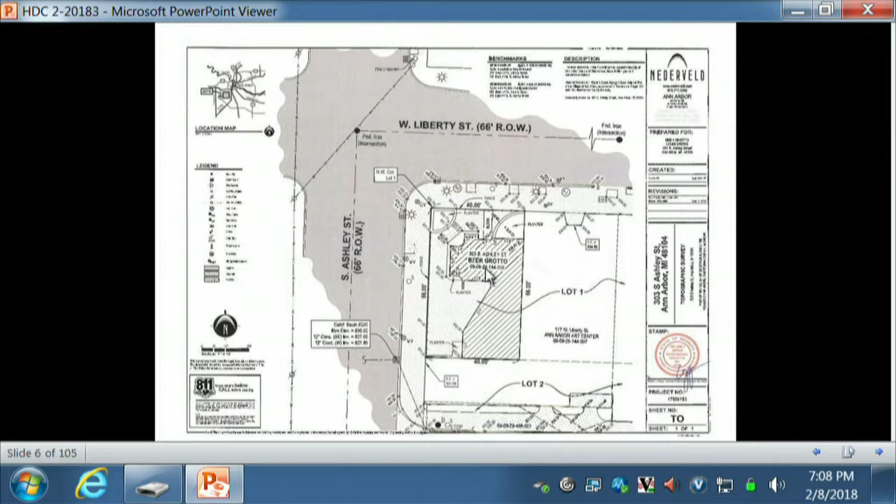They're proposing to put a canopy here. The filling station is angled here, and this is that new brick part that you see on the front. The canopy is proposed to go here.

It's pretty much where that tent is right now, so that gives you a pretty good idea of its size. The treatment of the ground, with some brick pavers and some concrete, is not proposed to change.

And this area just south of the canopy would remain open. It's got a couple planters and a tree back there. It would end basically at the south wall of this addition up here.

The canopy's supporting posts are inset - it's on the plans, we'll get to it - a foot or two, to accommodate the eave overhang so that it doesn't encroach into the right-of-way, which is on the other side of the fence.

Here's a little bit better photo from sunnier days, with the tent with the walls taken off. Lots of outdoor patio seating there. Old filling station in the back.

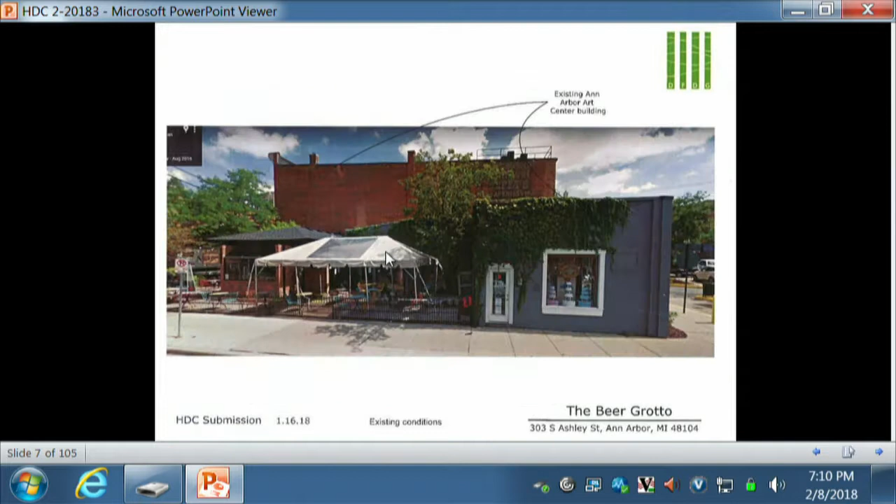One interesting thing is that the front wall of the building has this blue stuccoed wall that's very similar, with an old window in it, to the filling station part in the back. So I've always wondered if the older part of the building just wrapped around up here, and maybe that was the office or something, but I don't know. We've never figured that out because, again, we've never found photographs.

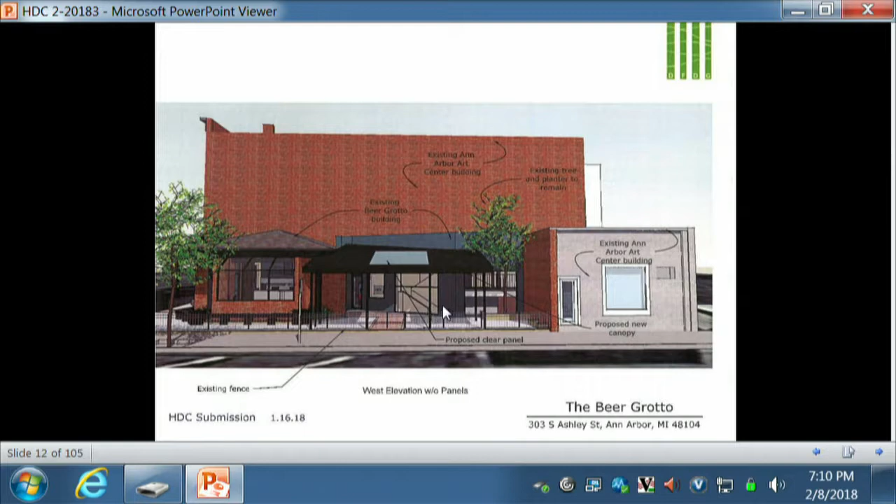So here's a drawing showing the fixed canopy - black, it's a vinyl or canvasy material. It's got a large clear plastic panel on the top to let light into it, and then panels can be added to make it more of a three-season type treatment.

There's the existing fence - you can see how those posts are set in a little bit to line the eave up with the fence. It tucks in nicely under the existing eave of the roof on the front addition, and it's got enough slope on it, hopefully, to get water and snow off of the top. There's another look at it.

So this building is tough because it's a contributing structure. You can pick out the gas station if you're looking for one, and the bays where the vehicles used to pull in, but it doesn't have a lot of character-defining features yet.

Fortunately, what they're proposing to do here is not permanent in nature and is pretty easily reversible. There's a system of attaching - I can't remember the strip - that the whole thing hangs off of onto the wall, which will be minimally invasive to the concrete block of the blue filling station part of the building, and again, very reversible.

And pretty transparent - you'll still be able to see through it. Another nice thing about it is this will not be conditioned space, so we don't count it as interior space, meaning it's not like an addition where they could go in later and blow out that whole wall of the filling station and just make it one big giant room.

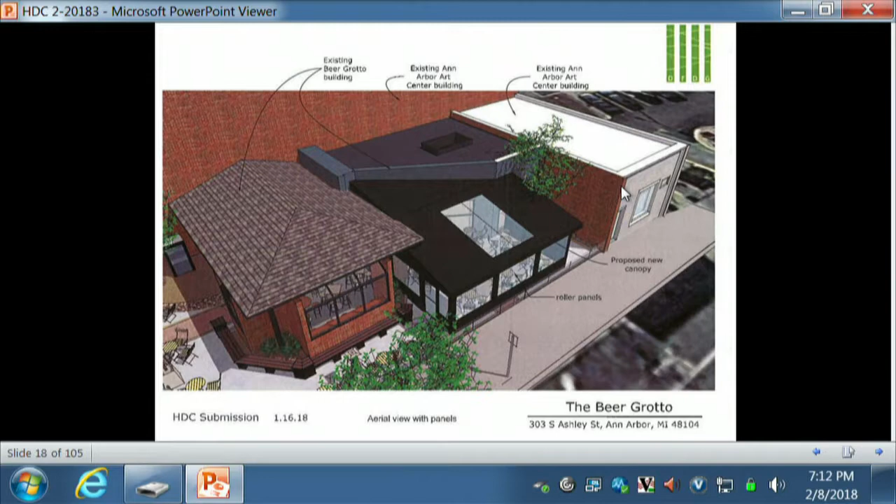Again, it tucks very nicely underneath the eave of the addition here, and hangs off the building in the back. That's a good shot. There are more drawings in the packet than we're showing here, but that shows you some of the roof structure.

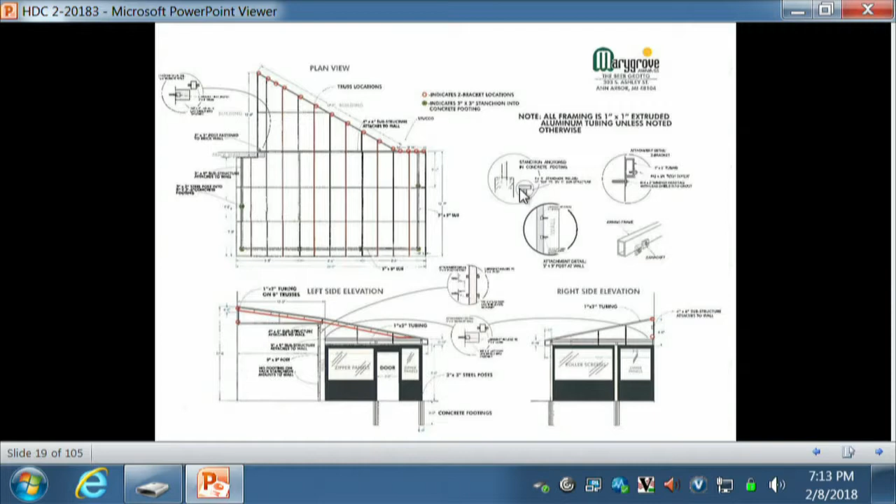The canopy is 26 feet wide and between 15 and 28 feet deep, depending on where you measure it. Just to be clear, it is intended to stay there year-round, and it will need to be site planned because it is additional year-round seating for the restaurant, for the beer grotto.

From the Secretary of Interior standards, number 1 says that a property will be used as it was historically, or be given a new use that requires minimal change to its distinctive materials, features, spaces, and spatial relationships. Number 2 says that the historic character of a property will be retained and preserved - the removal of distinctive materials or alteration of features, spaces, and spatial relationships that characterize a property will be avoided.

Number 9 says that new additions, exterior alterations, or related new construction shall not destroy historic materials that characterize the property. The new work shall be differentiated from the old and shall be compatible with the massing, size, scale, and architectural features to protect the historic integrity of the property and its environment.

Number 10 says new additions and adjacent or related new construction will be undertaken in such a manner that if removed in the future, the essential form and integrity of the historic property will be unimpaired.

From the Secretary of the Interior's Guidelines for Building Site, recommended is designing an exterior addition which is compatible with the historic character of the site and which preserves the historic relationship between the building or buildings, landscape features, and open space. I think that this accomplishes that by still retaining the feel of an open patio, but allowing it to be used in cooler weather as well.

Removing non-significant buildings, additions, or site features which detract from the historic character of the site. From the guidelines for the district or neighborhood, not recommended is introducing new construction that's visually incompatible or that destroys historic relationships.

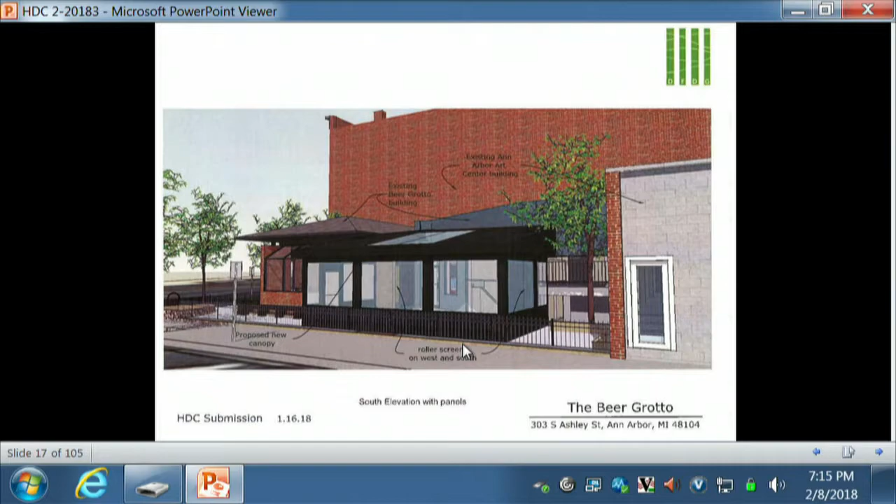You want to start this one? Sure, I'll give the report. It was such a nice day on Monday when we were out there. I generally agree with staff on this one. I think it's a very good solution, and it does meet our guidelines.

I think it does push the boundaries a little bit as far as space and sizing goes, but being that it was totally open 8 or 9 months out of the year, I think we're going to get a better look at the building with this structure than what they've been doing. It is removable — even though it's going to be there permanently, it seems pretty easily taken apart and down.

The one thing that came up at the site visit was anchoring into the stucco on the original filling station. Us not knowing really what's behind the stucco, and if we are actually destroying really nice bricks back there — maybe piloting and finding out first what's back there before blasting holes into the wall.

And I think another thing that came up on the site was about the fence. You'll see in the application there is an image that shows a new fence. That issue also popped up, needing a little bit of clarification from the applicant.

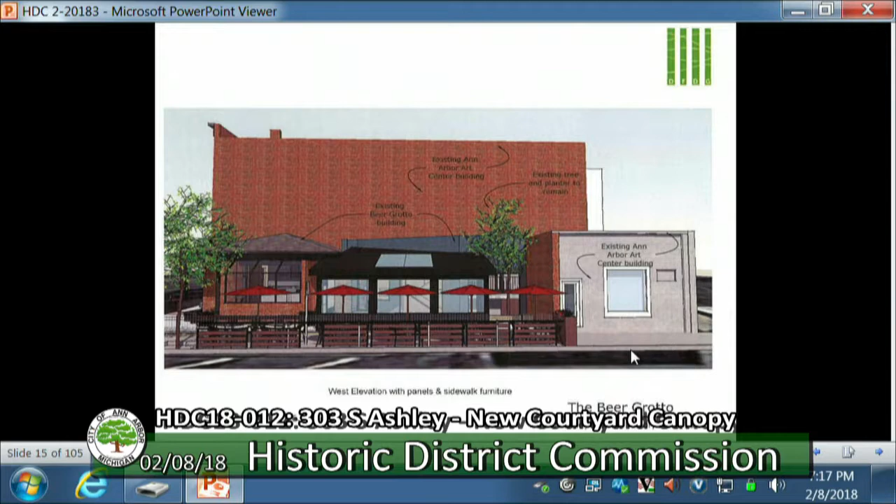Which image? The one with the red umbrellas in the front. There you go. Oh, that's the sidewalk, not the site — you can see the site is east of the fence, and these are on the sidewalk. Oh, that's seating, between the seating and the existing fence. Is that added in front? Yeah, it's the same as — that fence is out here, it's just a barrier for the sidewalk. Okay, we just didn't see that on site, so we looked at this and went, oh, is there a new fence or something? Yeah, that's with the sidewalk furniture, that's when they get their sidewalk permit, put that shown up temporarily for contrast.

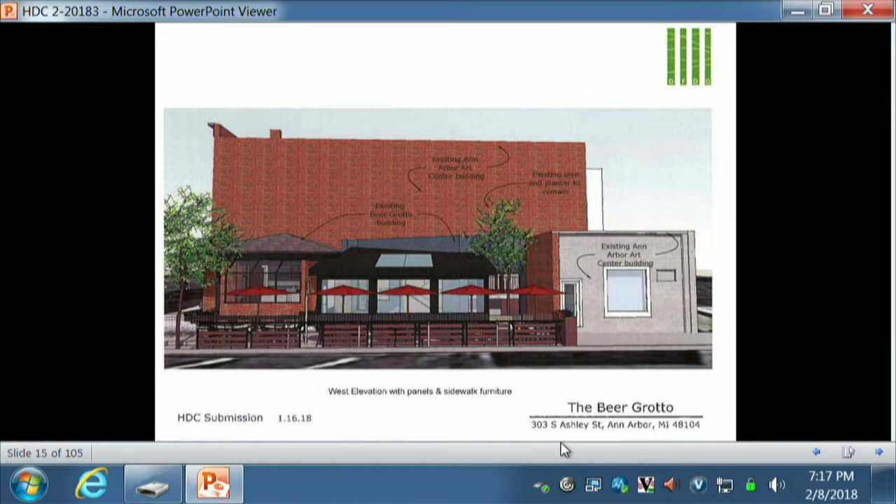So the wrought iron fence stays, things out there are temporary. And then we'll have to ask the applicant, or maybe Ms. Thacher knows about the material of the existing building, and if it's CMU or brick. I believe it's CMU, but we can confirm that.

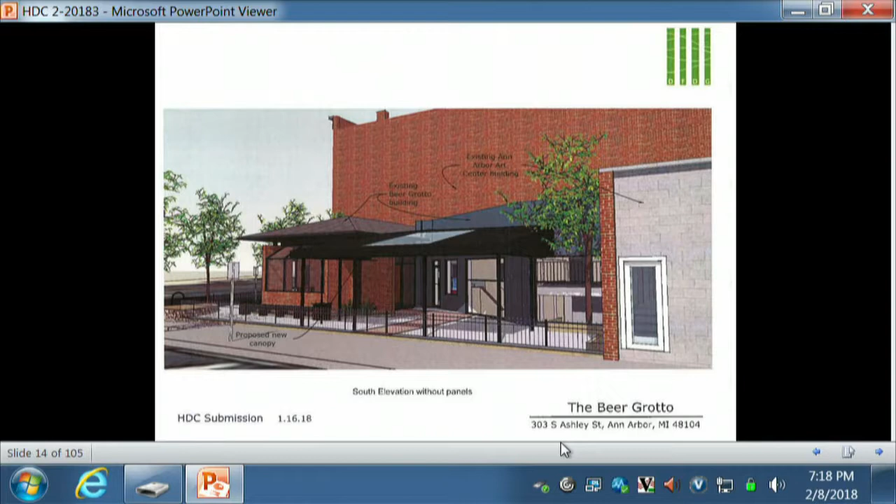Yes, my bad with the graphics there. That was just intended to show when the sidewalk seating gets introduced, that we have to do some sort of barrier there, and that'll be part of that application.

As far as the building is concrete block, I have some pictures we could pass around of the interior. You can very clearly see the coursing of the CMU on the inside. So we will trace through from that in order to put the anchors. If you look on the Marygrove drawings, the sealed engineering drawings on the front page in your package, this detail in the top right-hand corner specifies that we have to go into the grout in order to meet the structural binding, because of the lack of tie-in through the wall of a concrete block.

So we really have to accomplish that. I have with me one of the brackets and the screw that will go into the grout - there are 15 of these. And this is a piece of the top rail. The canvas gets wrapped around this, goes into there, and that's fixed to the wall. So 15 of these little pieces, and that's the top rail. I also have a sample of the two actual materials that we'll be using.

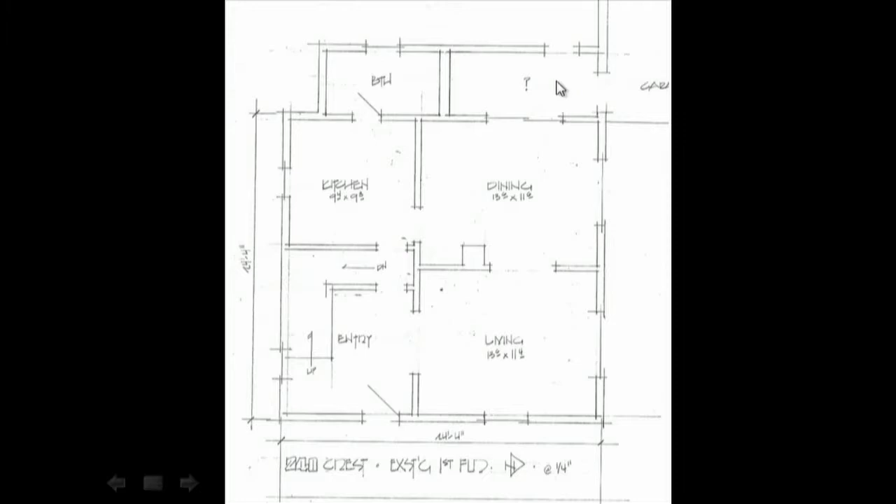Existing floor plan, pretty basic on the first floor: entry, living, dining, kitchen. That's a bath back there, and then this is just another space. This is the existing second floor above it.

All of the hashed area is existing, and this is the proposed footprint of the addition on the back. It fills in the corner nicely between the house and the garage. The deck wraps around to give access to the backyard, and there's a door wall or slider into a new family room on the ground floor.

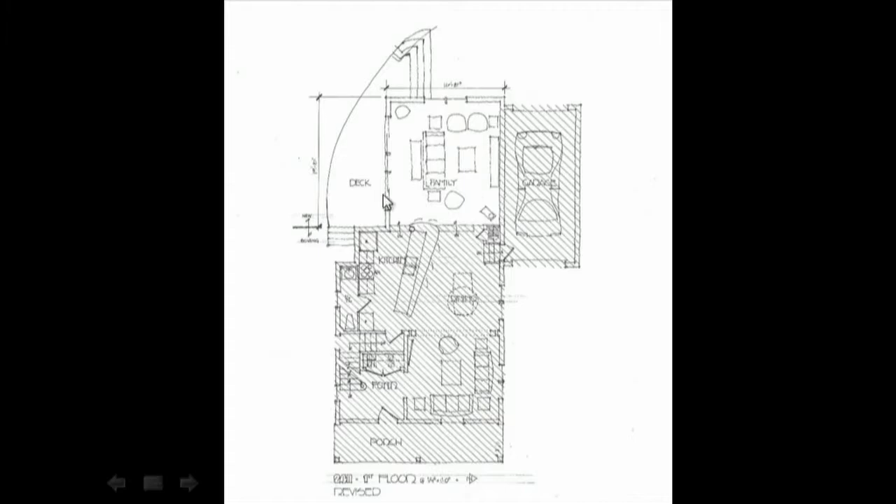On the second floor, there's a master bedroom, reconfiguring the existing floor plan upstairs.

From the front, things that will look different are a little saddle proposed between the addition and the ridge of the garage. The infill double doors would be replaced with a garage door again. On the back, you see the addition here. The ridge height is the same as the ridge of the house.

Looks really tall and narrow here. Bear in mind this is contorted on this screen, so it looks taller than it needs to. But this is that little bump out that I was mentioning before.

A portion of the rear shed dormer is preserved back there. There's a new garage door proposed on the back so that you could essentially walk all the way through the garage if you wanted to, or drive through. You could. And there, you can see the little saddle here.

Cladding on the addition is proposed to be a HardiePanel, so it will be smooth and will contrast with the shingles on the rest of the house.

Here is the garage side, the north side of the building. Existing garage here. You can see that the sidewall is flush with the sidewall of the house, though the roofs will intersect here, and you'll be able to see where the original sloped roof will still exist.

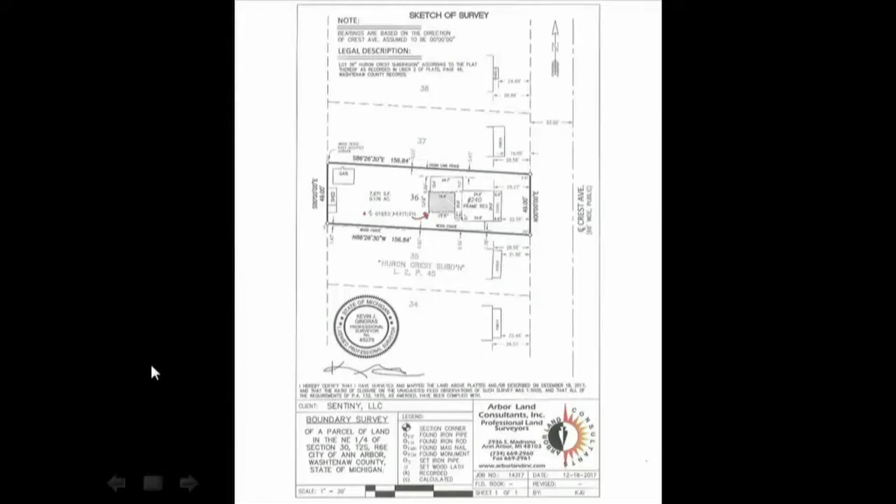So anyway, what I'm getting at is that I wouldn't lose any sleep over recladding that garage with new wood shingles to match and make it a little more weather tight.

There's no guardrail required or proposed on the deck. Deck materials are not specified, but I think it's okay to have it be a wood deck or an imitation wood deck. It's mostly out of sight and low to the ground.

There is a fence here, but we don't really count that. If the fence were down, it would still be pretty invisible from the street because of its low profile.

The list of work in the application includes finishing the existing outbuilding in the backyard, but no details are provided. So this statement is assumed to be just informational—maybe there's restoration work going on, maybe it's all interior—but no exterior changes are proposed in this application.

The Secretary of Interior standards that best apply - I read number 2, number 9, and number 10 to you. From the Secretary of Interior's guidelines, recommended is designing new exterior additions to historic buildings which are compatible with the historic character of the site and preserve the historic relationship between the building and the landscape.

Guidelines for all additions from the Ann Arbor Historic District Design Guidelines say it's appropriate to limit the size and scale of the addition in relationship to the historic building so it does not diminish or visually overpower the building. The addition's footprint should not exceed half of the building's footprint or half of the original building's total floor area.

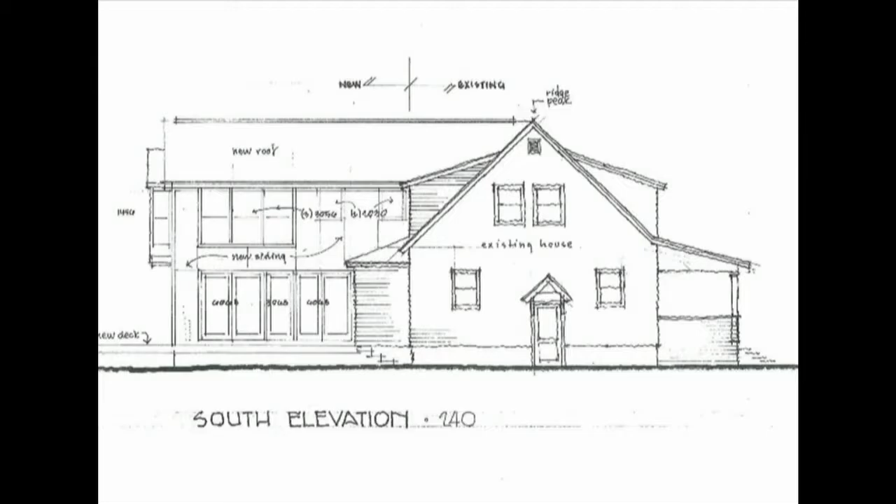Thank you. Myself and Commissioner Cope, we're on the review committee. Do you want to start the review again, or do you want me to? You can go ahead. Okay.

So where to start? It's definitely perceived as a very small house coming up to it from the street. The street front is fairly similar with all the rhythm of the houses in the adjacent neighborhood. What we can tell right off the bat going into the backyard is that all the houses around it are huge. They're big, they have big additions. This is the one on the block that hasn't been blown up in the back yet.

So in terms of the other quirkiness of the building, there was a discussion out on site with the builder we met with about the siding on the garage, I should say. So we'll have to get some clarification from the owners.

What else? Commissioner Cope, do you have anything else to add? Yeah, I guess I was a little concerned with the saddle as well. In the drawings, you see it there, but I understand its function of watershed between where the two roofs come together. But it just never, I don't think it's very clear in the drawings, what its specific use is or why it's there.

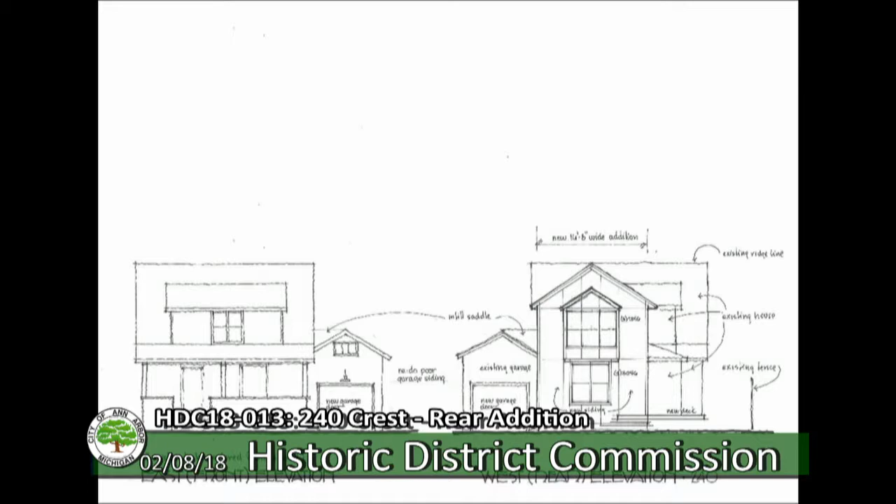I just didn't want to - getting the water off that intersecting corner there is problematic. So it would be much easier to get it to the back and get it off and deal with it there. Also, that's where we're going to have our stormwater detention feature, and we can move the water there. So it would be inappropriate to try and put something flat in there - it's just going to create problems for the homeowner in the future, plus snow collecting in there and whatnot. So the exact specific details of that saddle have not been worked out.

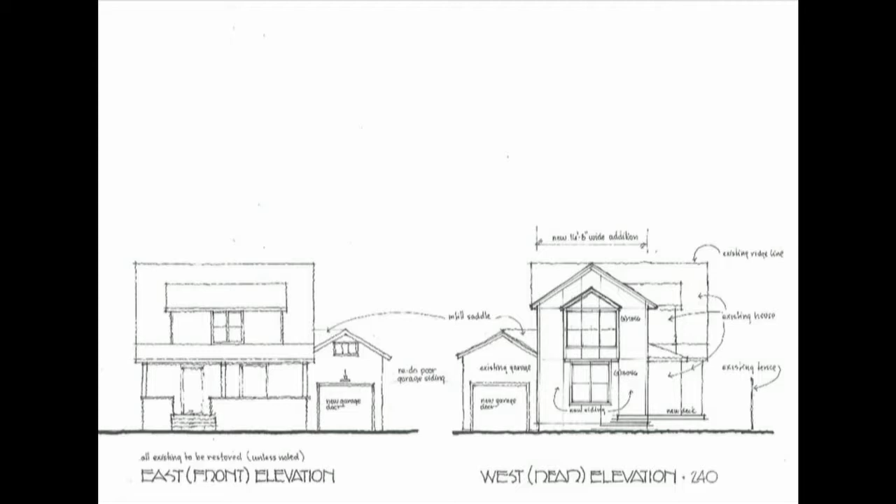But are you proposing a wall that would be in the same plane? No, it's just a roof plane. So the roof plane slopes to the back? Yes. At the front of the garage there'll be, above the plane roof, a wall that's flush with the front of the garage that goes up to the top of the saddle, and then it slopes back. A single slope? No, I want to angle it so it looks like a roof feature and not a flat wall - so it looks like a steep roof at the front part of the garage.

And then maybe that's 5% of the whole length, and the other 95% is all going to the back, or something like that. Do you see this elevation that's on the screen now? It sounds like a reasonable - well, that's shown as a vertical wall for the full length, but that's not my intention. So you're trying to move it back and have a slope? Yeah, so at the front it looks like a roof plane, not a wall plane.

We don't know if the existing garage is contributing, do we? Or do we think it was? The attached garage is contributing, it was built before 1925, or it shows up in the 1925 Sanborn. The building in the backyard doesn't show up on any Sanborns until the 70s or so. I've always speculated it may have been moved from another neighbor's property across the backyard and stuck there, because it doesn't look like a new structure, but it doesn't show up on the Sanborns, unless they just didn't peek around into the backyard.

Carl, did you say the two garage doors are for construction vehicles? Right, and to get back there, the backyard is a mess, and there's considerable landscaping that's going to have to go back in, so we need to get back there, and there's just no way around that.

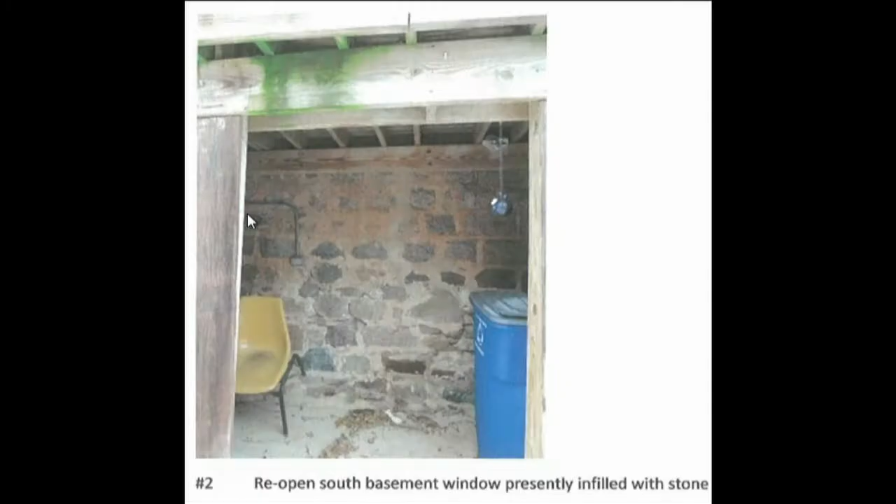There's an opening here on the wall that's infilled with stone that would be reopened. I'm sorry, it's an original opening that was refilled in stone. Here is the west basement window that would be reopened and reworked to make an egress window to an existing bedroom. This is the south basement window, yep, that's been infilled with stuff. You can tell where it doesn't match.

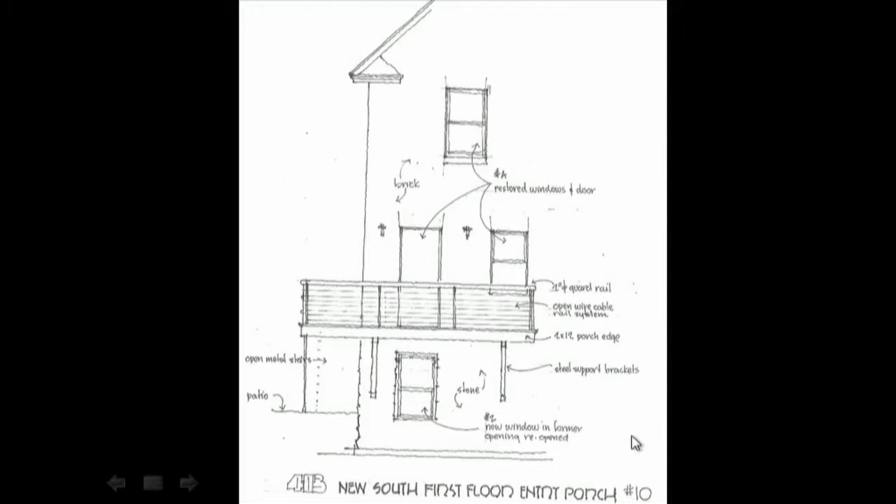Here's the new proposed back porch with metal stairs going down to the patio, with a very simple cable design for the guardrail. It should read as very inconspicuous and open up this whole area on the back so you'll actually be able to see that very cool stone wall on the back, the foundation.

Existing and reworked hump on the roof with glass panels, tempered skylights in the top.

Here's the carport. It is 3 bays. This building, if it's a duplex, will be required to have 3 parking spaces, and that would take care of that. You could potentially talk rental housing into counting that little garage as a parking space, but I doubt it's really big enough for most modern vehicles unless somebody's driving a Chevette or a Yugo.

The carport would have the effect of formalizing the parking area and keeping people from just parking all over the place. It is a structure and it is going to be pretty visible from West Liberty Street, so it has advantages and potentially some disadvantages.

It has vertical board screening on 3 sides, so it won't be entirely transparent. Standing seam metal roof. The whole structure is only about 14 feet tall, and if you consider there's a 4-foot retaining wall, you're only going to be looking at it from about here on up—actually, more like from here on up when you're looking from Liberty Street.

Example of a fence I'd like to use.

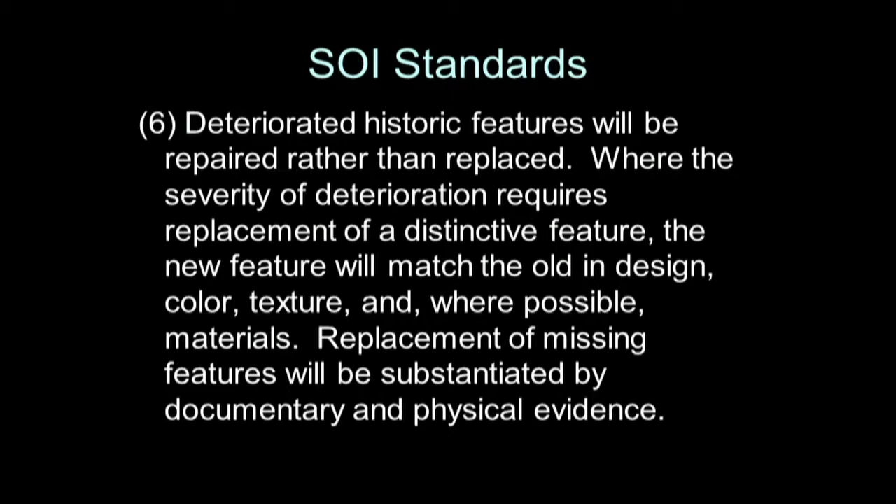I've read to you numbers 9 and 10, and this guideline for building site: it's recommended to retain the historic relationship between buildings, landscape features, and open space. Health and safety guidelines recommend complying with health and safety codes in such a manner that character-defining spaces, features, and finishes are preserved. For windows, it's not recommended to introduce a new design incompatible with the historic character of the building. That's as close as we get to talking about egress windows.

Just a couple more notes.

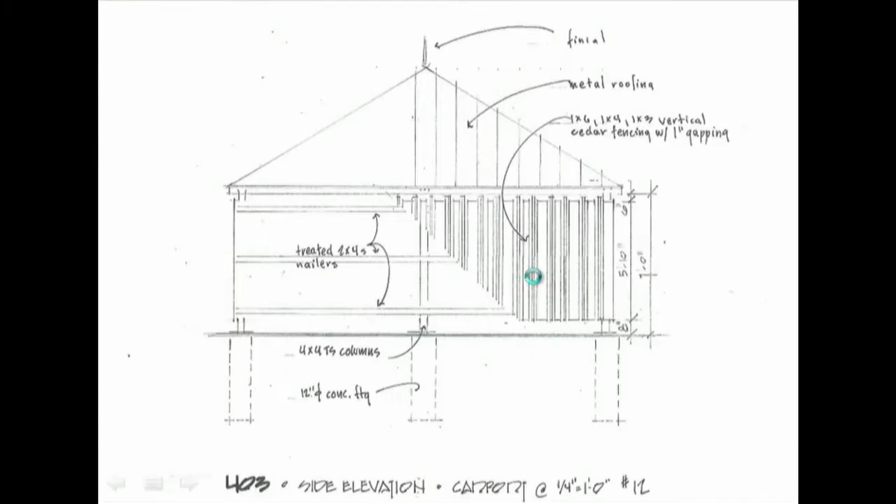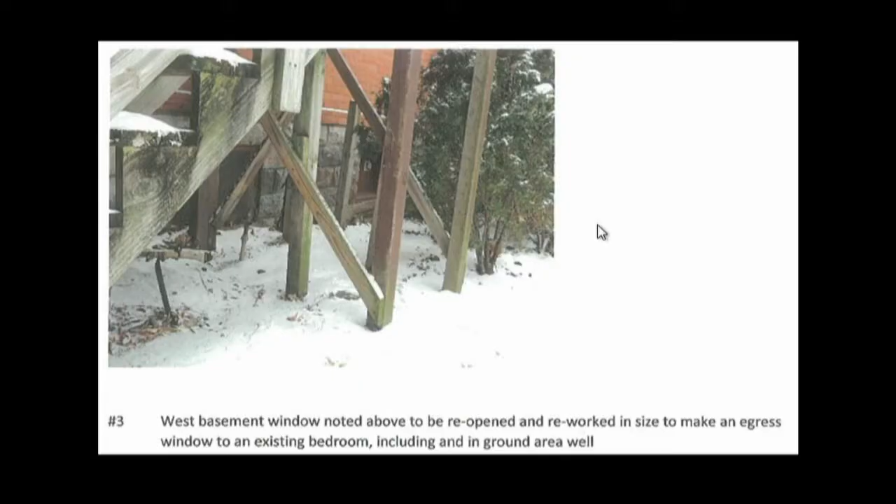The parking area in the back is proposed to be grass pavers—pavers with holes in them that vegetation can grow through—which I do think is appropriate. The patio is proposed to be a bluestone patio, which also will blend in quite nicely with the site.

I had a little email exchange with Carl Huter, the architect, about where the parking area would end in relation to the rest of the yard over here. It does seem appropriate to draw a line from the back of the garage or the back of the house to this area as the maximum size, so that from 2nd Street you still see sort of a gravel two-track going back here, which has been there for a long time.

Staff's opinion is that the work does not destroy historic materials, features, spaces, or spatial relationships that characterize the property, that the new carport is adequately differentiated and compatible in size, scale, and design, and that overall the proposed work enhances the character and historic integrity of the house.

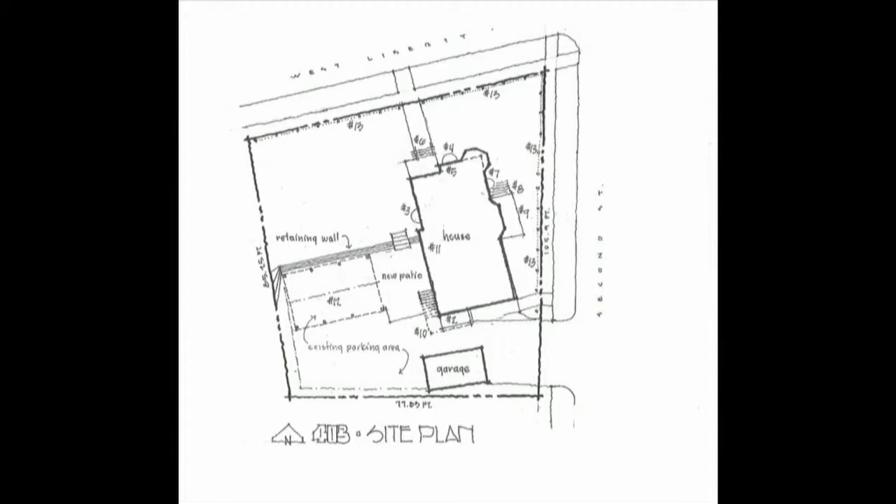One thing to keep in mind—it has nothing to do with this application—is I often get people who come in and say, well, I'll do this if you'll give me that. That's never appropriate. We just follow the guidelines and the standards.

I do want to point out, though, that there are a couple of egress windows near the front of the house. This one's not the one on the front of the house.

That could potentially be very visible from the street. I think this is one of them. That one just gets restored with a solid repair. There may be some work that's visible.

Quite frankly, an egress window well on this very large house with a lot going on is not going to be very prominent. The wells are proposed to be masonry, with one of them showing the grade on the east and west windows of how deep the wells would be. They are wood, it says here.

I sometimes get hung up on egress windows, and I really don't have problems with these. I want to make that clear, that I think they're relatively small and unobtrusive, and even if they're quite visible from the street, there's so much going on in the rest of this house that I don't think they're going to call attention to themselves. I think it's appropriate to repurpose the basement of this house as a single apartment, and that is necessary to do that.